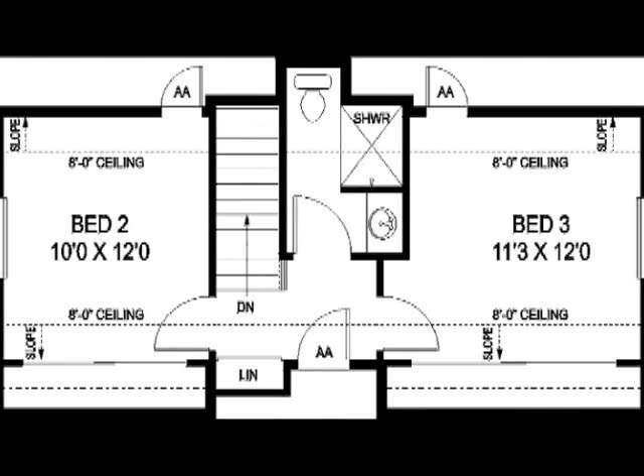Hey guys, this is Ernie with learningconstruction.org, and in this video we're gonna see how to frame an exterior wall.

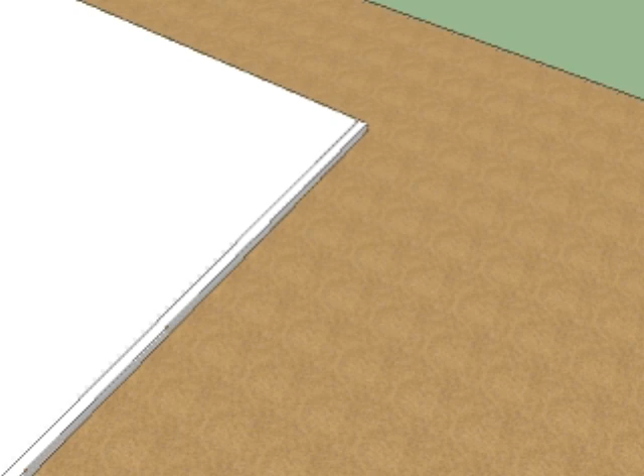The first thing we'll do is look at our ready-made foundation. Once you have the layout complete, you can define the length of the plates that you'll be using, the sill plates and top plates. That'll be the first thing that you're gonna cut. After you have your sill plate, you're gonna have to drill through for all the bolts that you placed in the foundation. Now remember, don't put the bolts on just yet. We're gonna need this plate when we start framing the wall.

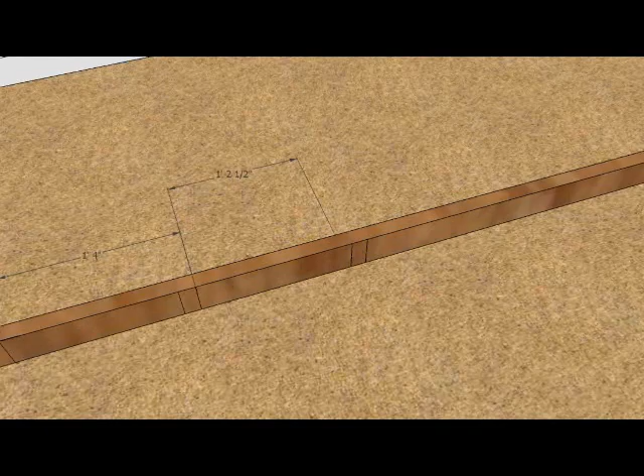The next step is to cut your top plates. You're gonna need 2 sets of top plates for an exterior wall, and don't forget that if you need to splice the top plates, you're also gonna have to overlap them on the top or the bottom.

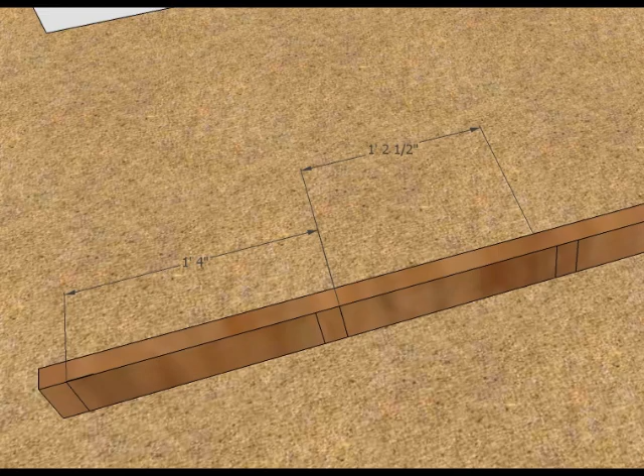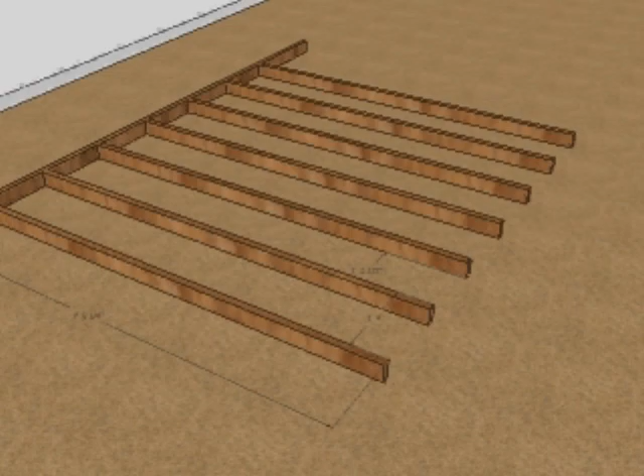Okay, now we get to mark the studs. Your studs are typically going to be at 16 inches on center, or 14.5 in between studs. Once you have this laid out, you can start placing your studs. The size of the studs will vary depending on the height of your wall. The stud sizes may be 92 and 5/8 for an 8-foot wall, 104 and 5/8 for a 9-foot wall, and 116 and 5/8 for a 10-foot wall.

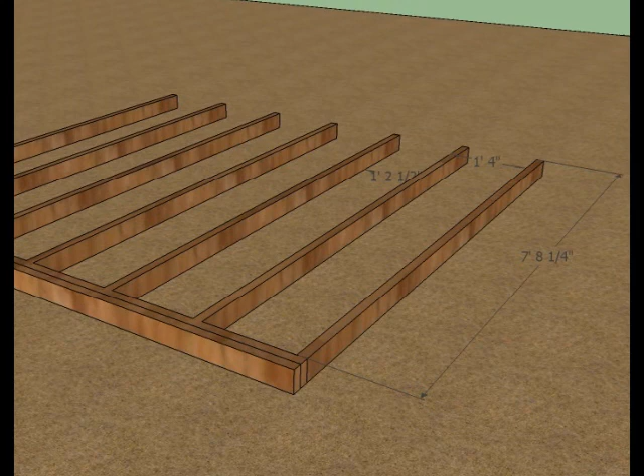Okay, now you have the studs laid out with the top plate. When you start nailing them, use 2 nails on the top of the top plate to connect them to the studs. Try to separate them evenly and don't nail them in the middle. This way you'll avoid future warping on your studs.

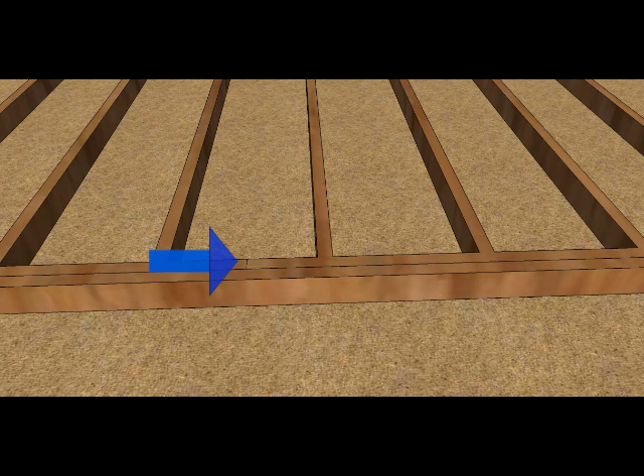Okay, I would like to talk about the splicing a little bit. When you splice the walls, for example, if you have the bottom part of the top plate that needs to be spliced, make sure that the top part of the plate is at a minimum of 4 feet away from it. This dimension may change depending on the building codes that you're using and the state that you're in, but 4 feet is a general dimension that I use and I never had problems with in the past.

Okay, the next thing is the nailing. In that splice you'll have to add 8 nails on each side of the splice, so it will be a total of 16 nails. Newer codes will require you to have more nails, and some structural drawings will also require you to have straps in lieu of the nailing, for example, a Simpson

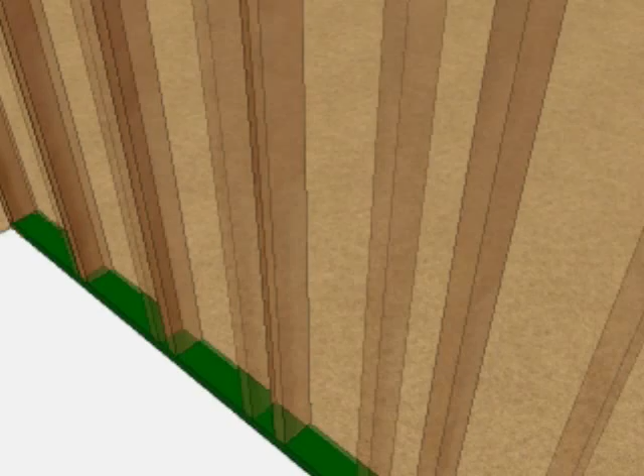ST24 or an ST36. Okay, once you have your top plate nailed, it's time to take your wall and install the studs to the mud sill. So you can take the mud sill off the footing and install it to the wall, and then you can replace the mud sill with the wall onto your foundation. With the walls done, you can use a brace attached to the floor just like it's shown in the video.